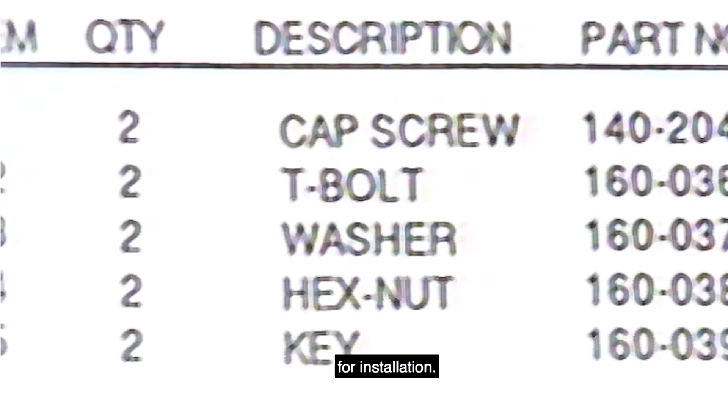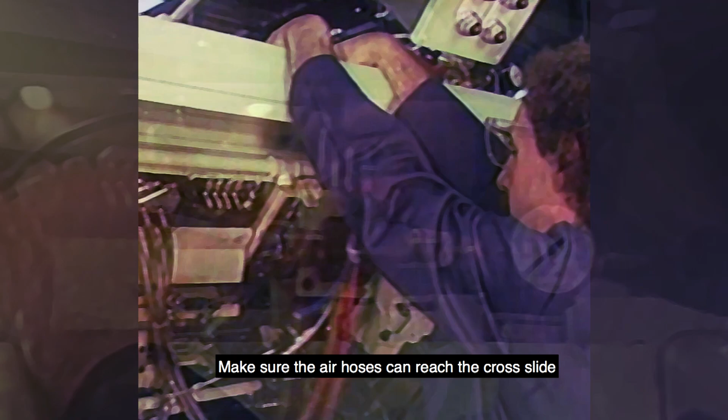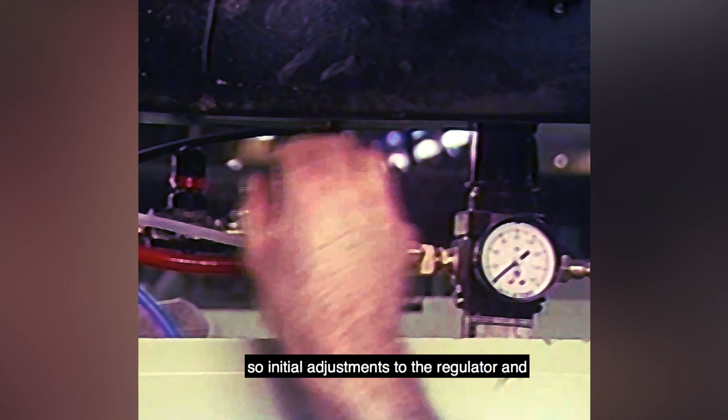Begin installation by mounting the control valve assembly in a location that is easily accessible on the machine frame. Make sure the air hoses can reach the cross slide on which the attachment will be mounted. This mounting position should provide convenient access so initial adjustments to the regulator and periodic maintenance can be easily performed.

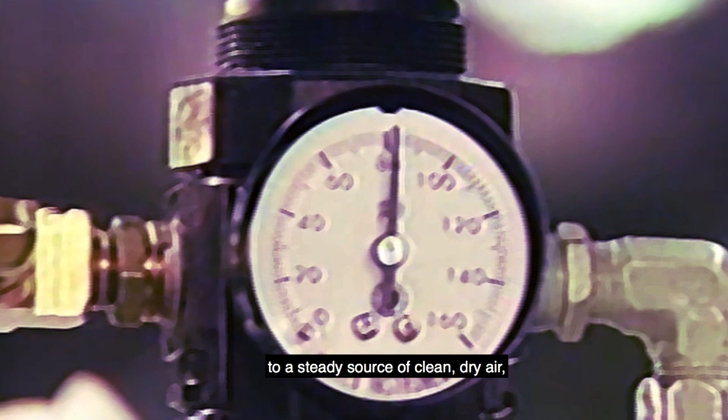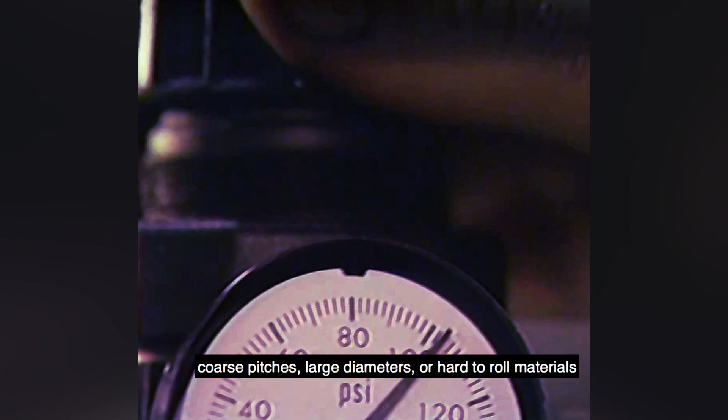In order to operate properly, your thread rolling attachment must be connected to a steady source of clean, dry air at a minimum pressure of 80 psi. Difficult applications involving long thread lengths, coarse pitches, large diameters, or hard-to-roll materials may require up to 110 psi.

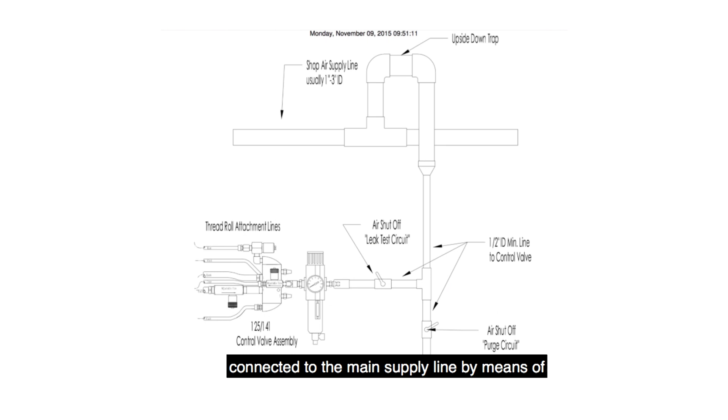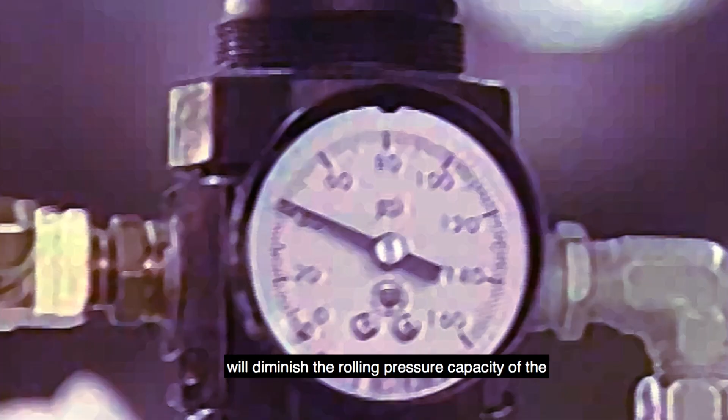The control valve assembly should be directly connected to the main supply line by means of a minimum ID feed line of 1/2 inch. A smaller ID flexible plastic or rubber feed line, such as the type commonly connected to a handheld blowgun, will diminish the rolling pressure capacity of the thread rolling attachment.

To install the trip bracket and valve mounting bracket, refer to the trip valve assembly drawing. The trip bracket must be mounted in a way that it can depress the trip valve button when the cross slide reaches the full forward position.

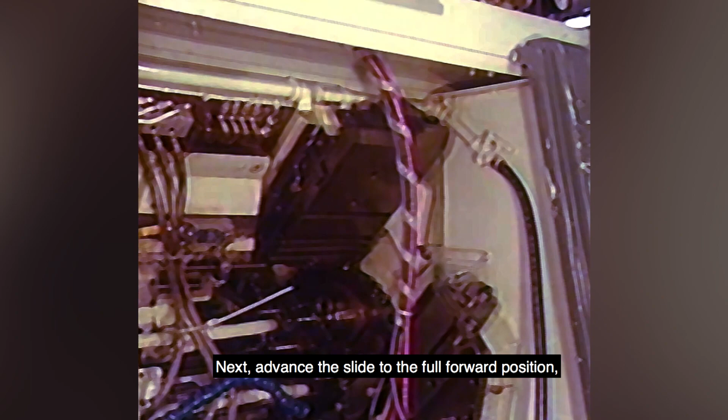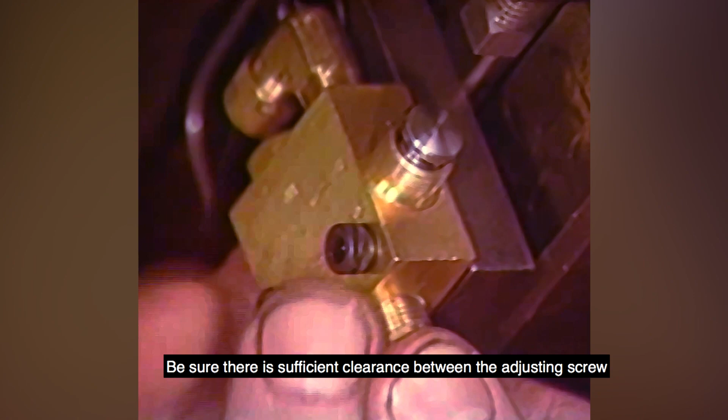Next, advance the slide to the full forward position and assemble the adjusting screw and jam nut into the trip bracket. Mount the trip valve button. Be sure there is sufficient clearance between the adjusting screw and the trip valve button. The adjusting screw must not interfere with the adjustment of the full forward position of the cross slide.

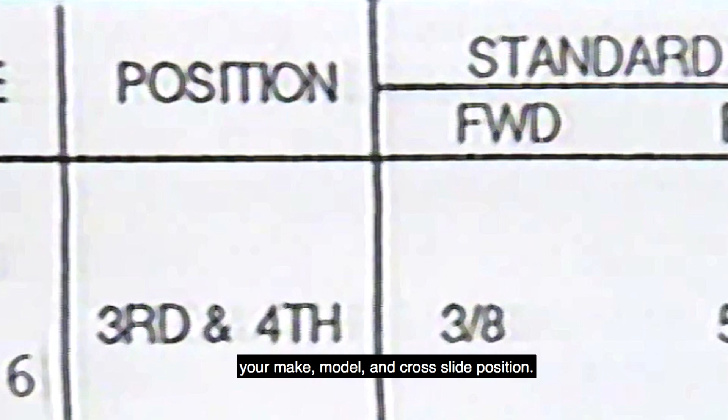Look again at your mounting information drawing. Make sure that the drawing refers to your make, model, and cross slide position. Notice that some attachments mount directly to the cross slide. If yours does not, then an adapter plate is necessary for your application.

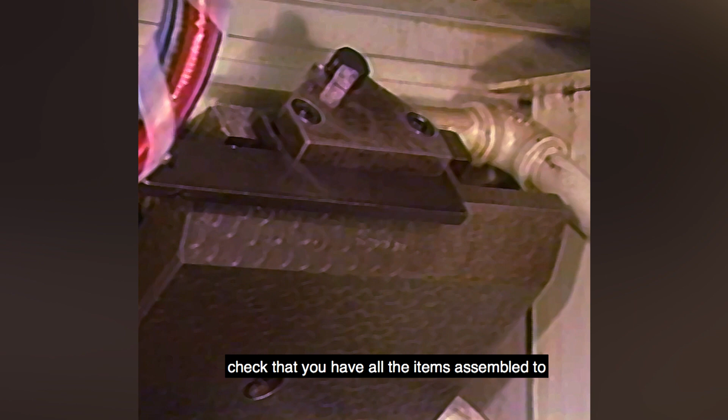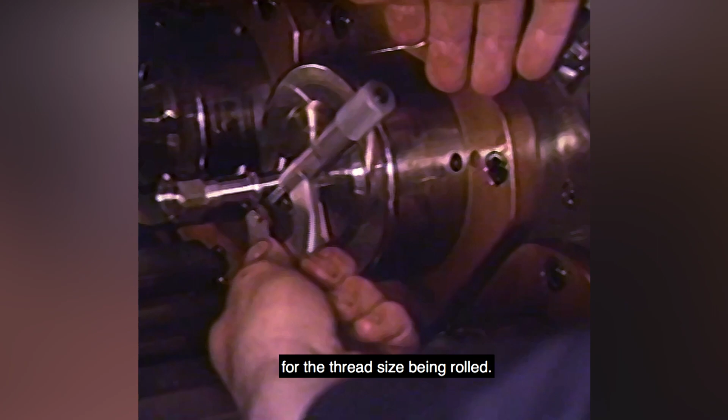Using the same drawing, check that you have all the items assembled to the cross slide in the proper configuration. The gauge setting must be taken against a blank that has been shaved to the correct diameter for the thread size being rolled. Therefore, locate your specific thread size in the thread rolling capacity and reference data charts and arrange to have the appropriate diameter blank in the spindle.

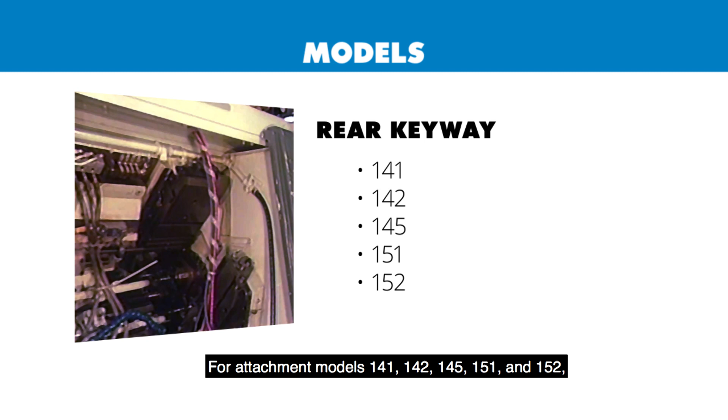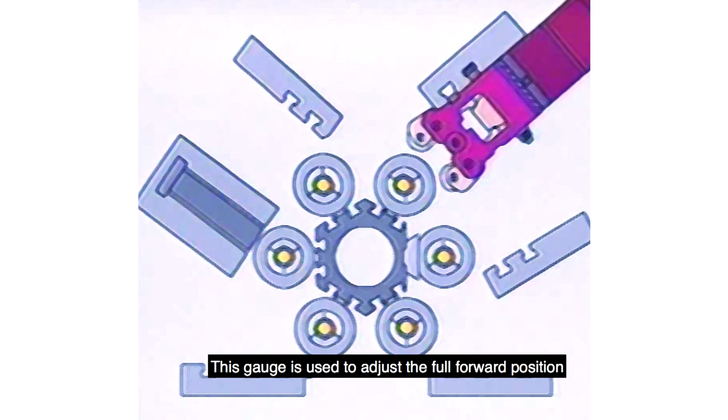Advance the cross slide to the full forward position. For attachment models 141, 142, 145, 151, and 152, the gauge is located in the rear keyway. For all other models, the gauge is located in the front keyway. This gauge is used to adjust the full forward position of the cross slide so that when in the full forward position, the thread rolling attachment will be aligned over the center line of the part.

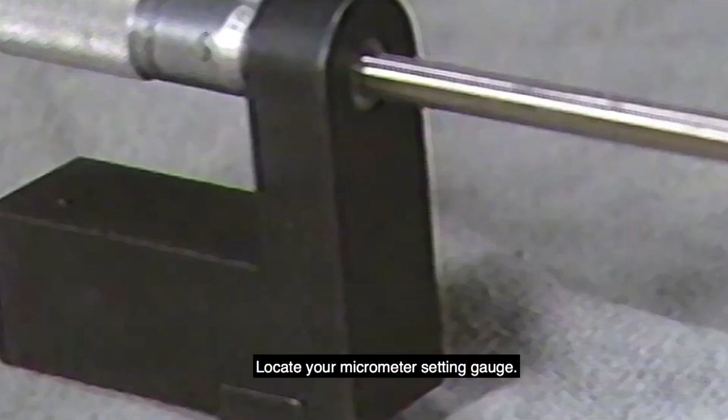Locate your micrometer setting gauge. Adjust the micrometer setting gauge until the key is located in the T-slot of the cross slide or the adapter plate if applicable. Hold the gauge firmly in position and adjust the micrometer until it touches the sized blank.

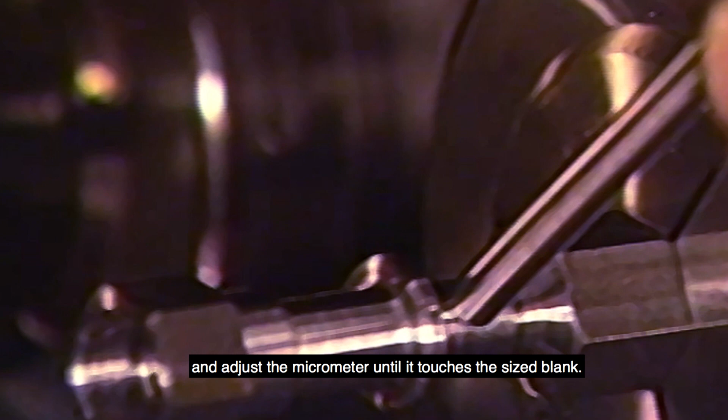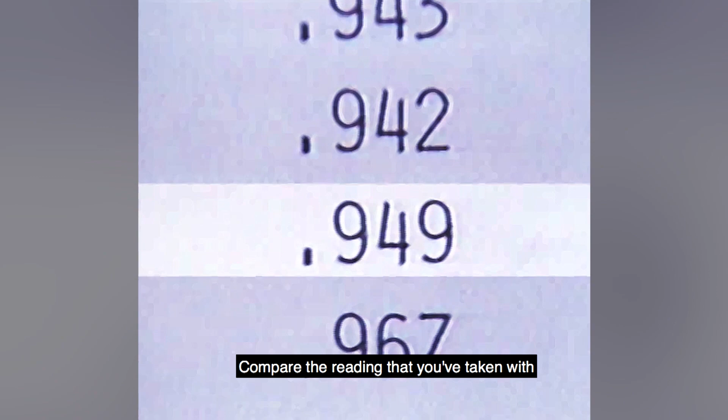Note the reading. Obtain the correct gauge setting from the thread rolling capacity and reference data charts. Compare the reading that you've taken with the correct gauge setting dimension. Adjust the cross slide if necessary to obtain the correct reading.

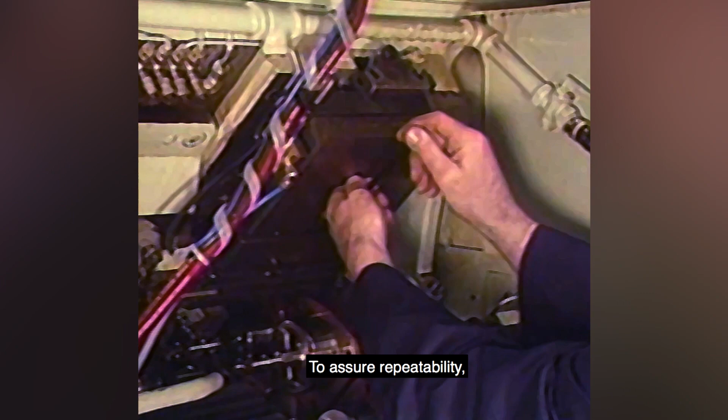To assure repeatability, it is recommended that the last 3/1000ths to 5/1000ths of adjustment be obtained using the cross slide positive stop.

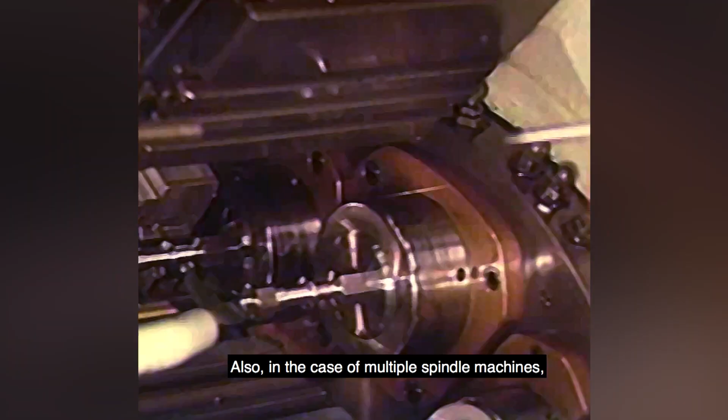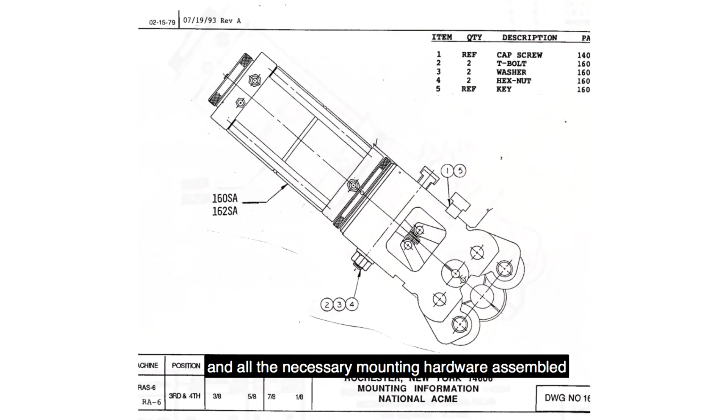Also, in the case of multiple spindle machines, it is recommended that the gauge setting be taken against blanks in all spindle positions. Refer to the attachment mounting drawing in Section 5 of the manual. This drawing shows the thread rolling attachment, the adapter plate assembly if applicable, and all the necessary mounting hardware assembled in the proper configuration on the cross slide.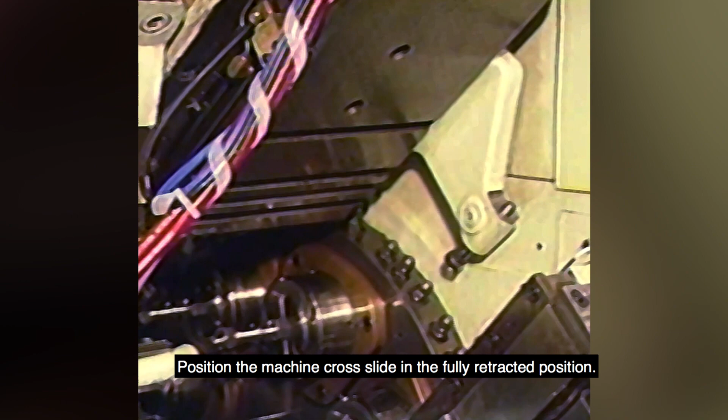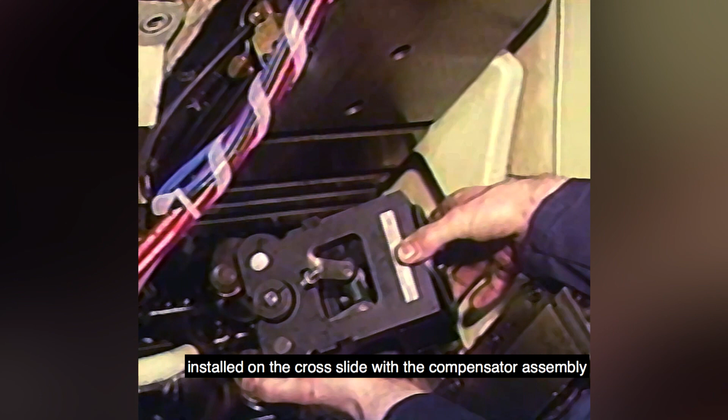Position the machine cross slide in the fully retracted position. Note that the thread rolling attachment has two surfaces on which it can be mounted. To determine the correct surface, position the thread rolling attachment so that it can be installed on the cross slide with the compensator assembly facing away from the spindle.

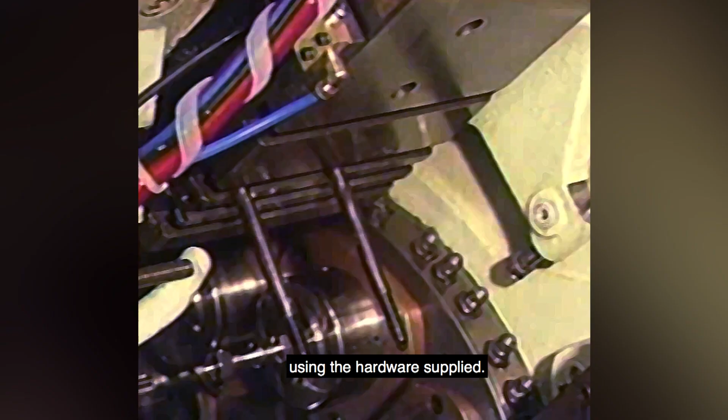Note the mounting surface to be used. Install the attachment keys to this surface using the hardware supplied. Assemble the remainder of the mounting hardware to the attachment and install it on the cross slide or adapter plate. Tighten the mounting hardware enough to secure the attachment in position, but loose enough so the attachment can be positioned from side to side.

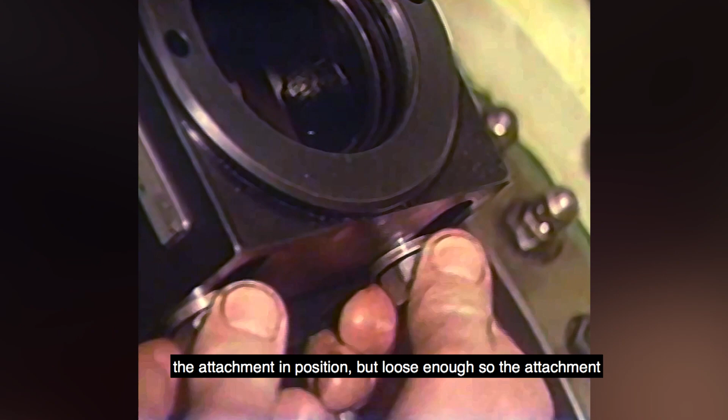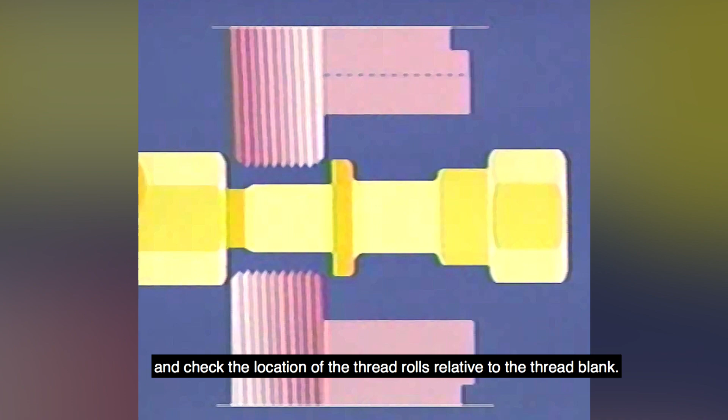Advance the cross slide to the full forward position and check the location of the thread rolls relative to the thread blank. Adjust the attachment position from side to side as necessary and tighten the hardware.

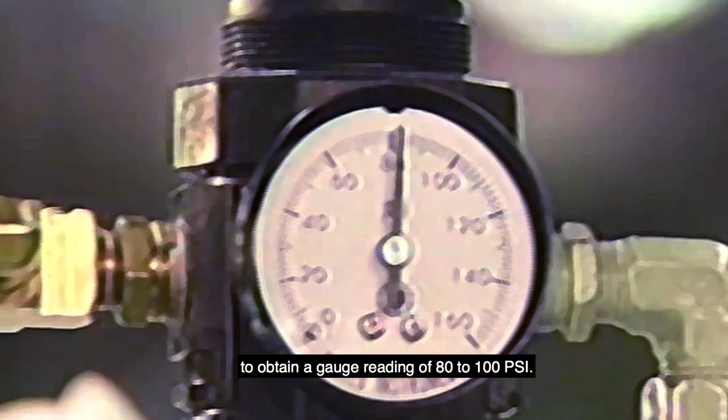Retract the cross slide and adjust the air regulator to obtain a gauge reading of 80 to 100 psi. Connect the air lines and perform the following adjustments.

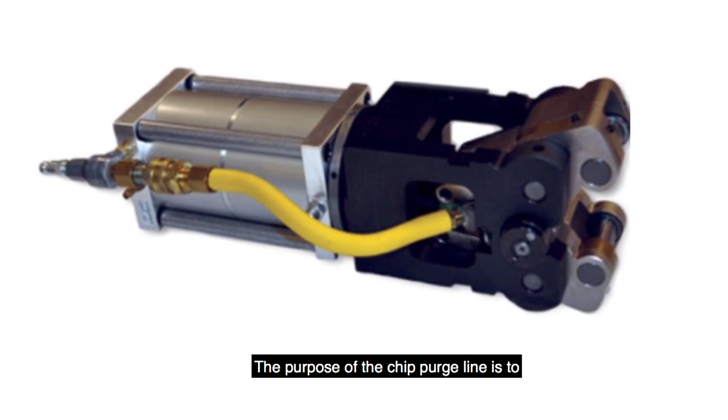Operate the flow control valve that is connected to the chip purge line. The purpose of the chip purge line is to pressurize the compensator mechanism area, which helps eliminate chip accumulation in the compensator gears. Open the valve until you notice a 2 to 3 pound drop on your pressure gauge.

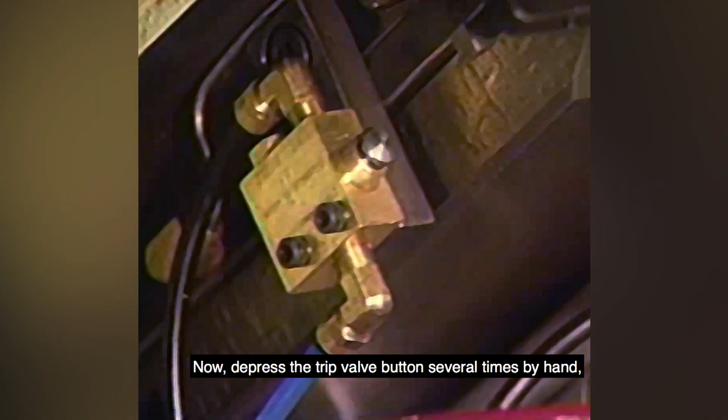Now, depress the trip valve button several times by hand while operating the flow control valve in the red outline. Note that the attachment will cycle faster or slower depending upon where the valve is set.

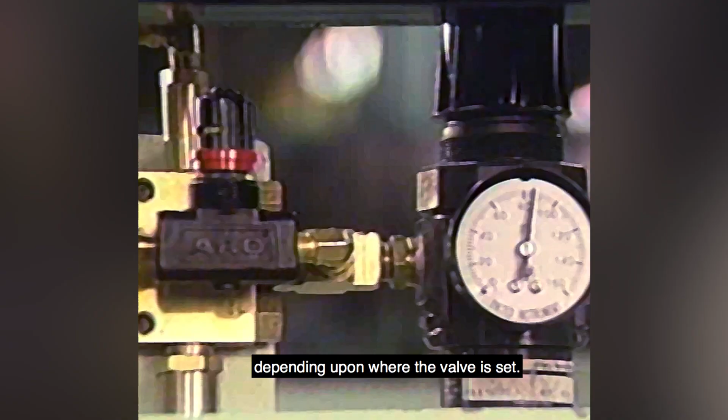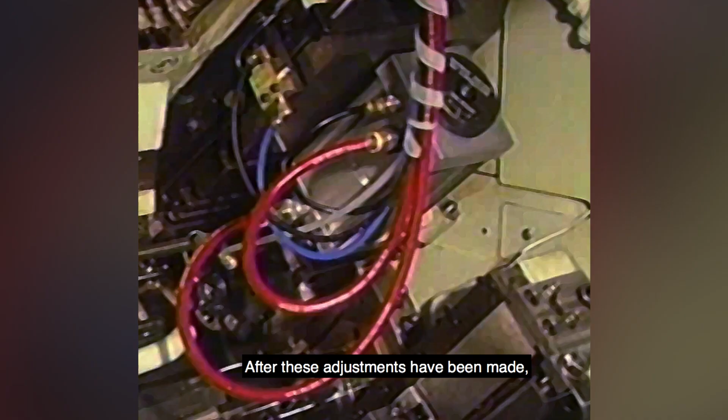This is where the penetration rate is adjusted depending upon the material being rolled. Initially, set this flow control valve for the fastest possible attachment cycle. After these adjustments have been made, check the clearances on the machine.